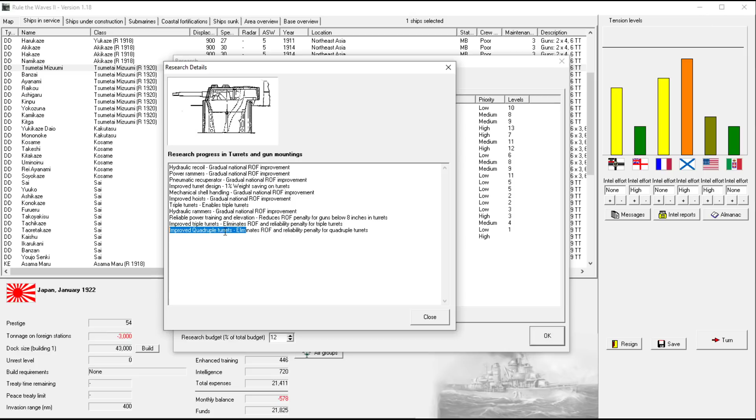Okay, so this list is probably... this might be a small change that would be nice for Fredrik to make. Just to put, if you get improved quadruples, put right above it at the same time, just put quadruples first. So that, I don't know, just make it more clear. Maybe it's not necessary, I don't know.

What happened? Why suddenly are we... what happened? Does my tonnage requirement go up or something? Okay, that's weird. Okay, well let's just... what do we throw? Oh, you know what we do? Where's that one destroyer? Okay, the 3 destroyers, perfect. Is this 3,000? No, it's not. Wow, this is really sad.

So these guys are all going to be sent down to...

Yeah, I think we're going to send all of these to South Pacific. And then that's 2,500, so we need one of these as well. Let's send this one down, or let's send this one to Southeast Asia. It'll be a nicer organization to do it this way, and send this one down to South Pacific.

In the meantime, we'll get any one of our ships. Well, I guess it should be one that we put on active duty. Oh, we don't have any, they're all in the shop. That's right, because we got director.

Can't bring myself to do it yet. Did we already upgrade these guys? It's just funny how we have no quality 1 weapons except for 6-inch guns.

Okay, you can go to active fleet and you can move to Northeast Asia. And then we'll put you back on reserve, but we might actually be refitting the Kushinos.

I think that we do... oh, they already have quality 1 6-inch guns. That was good, that was a good move.

And I actually want more of these... do we build a new light cruiser, or do we just get another Chunchunmaru? These are the ones with the underwater tubes, which is just so bizarre. 1, 2, 3, 4, 5, 6.

The 6 broadside for 6-inch guns is pretty good, and it kind of has the advantage of being able to fire 2 guns forward at any kind of angle. If we're dead on, they can't, but even at like a 30-degree angle, I think it's 30 degrees, maybe it's 15, but it's not that much. We're going to be able to get these wing turrets able to engage a lot quicker.

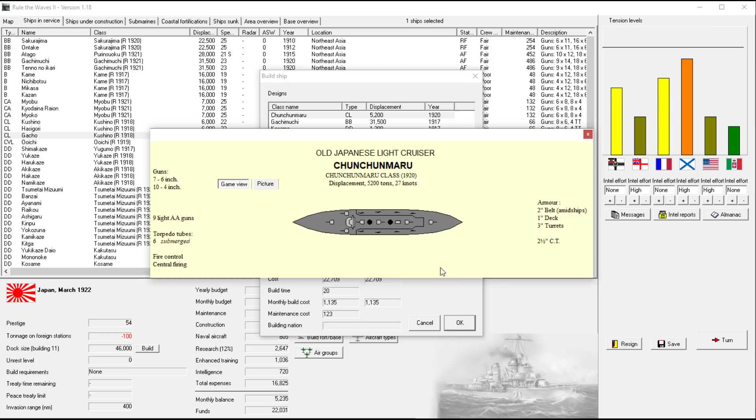Now what's going on here? I did the math. You said 3,000. You're saying that, okay, did I do the math wrong?

These are colonials, so I think they count for more than 600, but let's just pretend that they count for 600. We also have their 9, this is 18, plus 7 is 25, plus 600 is 3,100. I don't know what the hell's the problem here.

What is the problem? What is your major malfunction? I guess we can just toss a bunch of the Akikazes in there. I don't really want to, but it's not that big of a change, so we'll do it.

They will guard the South Pacific with a few points at least. We'll have 6 points worth of destroyers in there. I'm going to leave the Asama Maru there as well. It doesn't matter that much.

Was this 10 or 11? It's only 10, I'll wait a little bit. We'll probably move all the Tsumetai Mizumis into Southeast Asia when the time comes.

And how soon do we have to do refits on these guys? We still have a little bit of time. 5 years? Well, 5 years is getting up there. Although I do quite like the mothball.

Gosh, man. Yeah, I know. We're running out of time.

And we don't want that one wandering off because she has short range, so I'll get one of the Kames. No, they're on mothball, which is great. We'll get one of the Myokos to be foreign station. They might actually be good candidates for Southeast Asia as well.

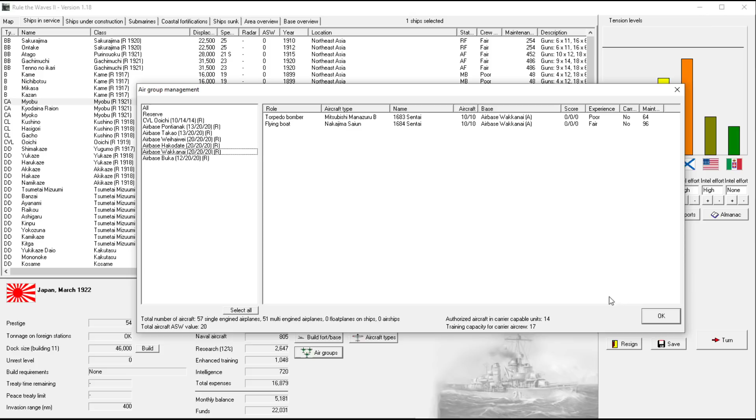And okay, air groups are looking good now. It's probably worthwhile — oh yeah, we want these to all be on reserve. If tensions creep up at all, I probably will activate them, and I probably will mobilize. That will also probably bump the tensions up, and then we'll get to war status.

Yeah, I think I'm going to build 2 more Chunchunmarus. One thing that we'd be okay with having less torpedo defense is if we decided to build a dedicated light aircraft carrier.

Forget the name here for a moment because I think that the name will be changed. So 4-inch guns are going to be good for dual purpose. So I think this is already a good start. They don't need that many guns, we could probably even drop some. Director firing.

Yeah, we're not going to have anything else. 24 — wow, this is actually not a bad airplane, not a bad carrier to begin with. We don't need this speed. So this is 260.

It's a little bit less. Not bad though, maybe we'll leave it at 24. That's pretty good. Okay, and that gives us 2 extra airplanes.

How is it possible that you just don't have a conning tower? I don't want our turrets to be destroyed, so I'm actually going to upgrade this. I like the deck at 2 inches.

Nah, you know what? We're not going to bother. We're going to basically concede that if they hit the flight deck, it's a dead carrier. We will try to do torpedo defense 1. We can get 28 aircraft now, which is still pretty good.

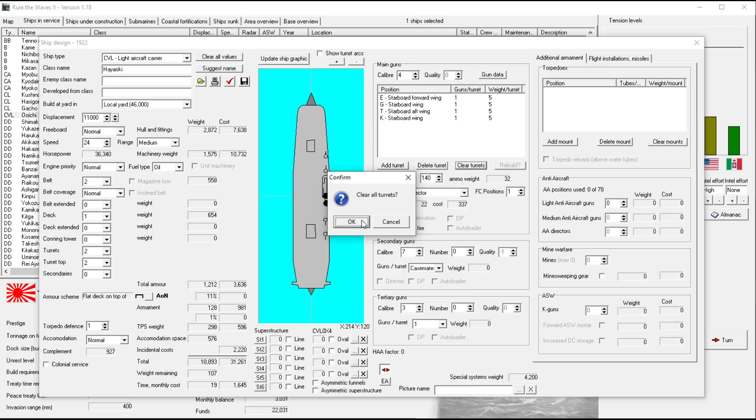Yeah, it would give us one more aircraft, but I think that's not worth it. EGIK. Okay, that's fine.

Oh yeah, we could always up the tonnage until we find — can we get to 30? I would like to get to 30. We can very easily get to 30.

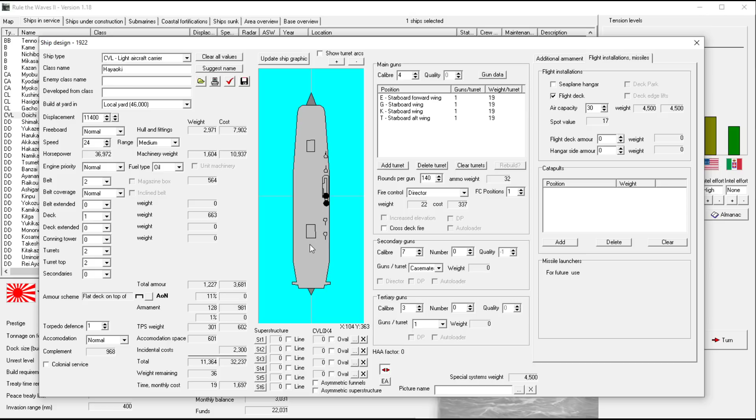What's the maximum for us? 34. Okay, set it to 34 and make it so.

All right, this is what we have to work with. I don't understand why there's no conning tower. Okay, there we go.

It doesn't seem... maybe it's fine, actually. It doesn't seem fine, but maybe it is. Alright, that's not good, no, we're not going to do this. No, definitely not.

Because we're going to want lots of anti-aircraft. Yeah, so let's just crank this and then... 85.

Okay, 22, we can get this up to 2. Alright, the gods have spoken. 2, that's pretty good. How expensive is this? 35.1 — I think it's worth it to get 34.

I mean, this is going to be... yeah, this is pretty good. I feel like this is pretty good. I'm getting excited about this. When I start getting excited, that's when I think I have a design that's worth keeping.

It's going to have at least a decent ability to ward off, and this also has weight built in, which we can later use for mediums and AA directors and dual purpose and all those kinds of things. Frankly, we don't even need director firing, but I don't know—if anyone in the comments knows, does director fire control have any impact on the dual purpose nature of the accuracy for targeting aircraft? So if I chose something like local only, but also put AA directors, would these guns still be as effective fighting off aircraft? Because I'm not expecting my ship to ever engage other surface ships—it's already lost if that's the case. So I just want the 4-inch guns to be useful as dual purpose guns.

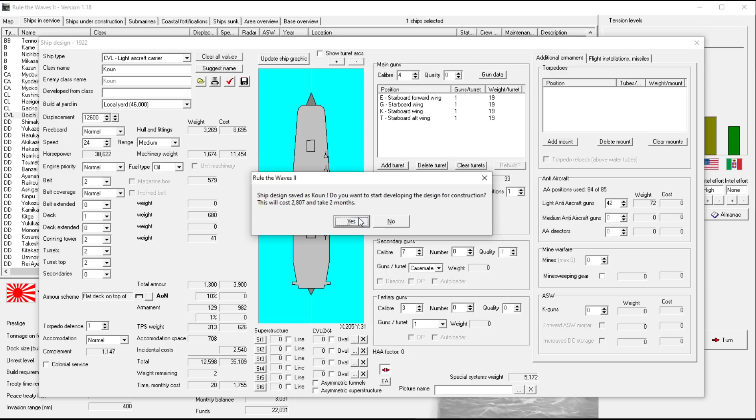So we're going to save this. We're going to let this design be designed. And this light aircraft carrier class should have purpose, should be used for the rest of the series—I do expect it'll be there for the rest of the series because it's pretty efficient.

So you can send it to sea zones where maybe you don't expect as much. We may want to fit it with more fighters and have it more as protection for some battle group or something. Unfortunately, with the battle generator, it doesn't really give us an opportunity to pair ships like that, which I've always thought you should be able to do. I've always wanted to do that, and maybe one day I'll write a mod to do it, but that day is long in the future.

So that's one—we're going to wait for that, and I have the backup name, Nikko, as well. So let's push on. Don't really want to anger the two sleeping giants, but that's not too bad.

Easily surpassing her design speed. See how much more important it is to have not-backwards shipbuilding? Typically with backwards shipbuilding... oh wow, that's actually important.

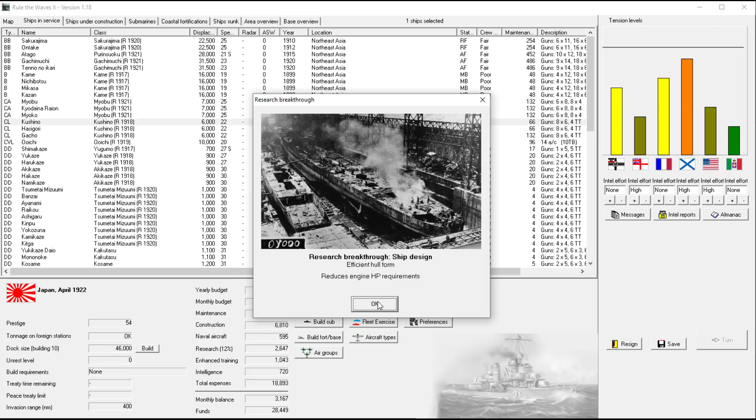We're going to have to redesign the light aircraft carrier. Actually, maybe we don't need to—it's a pretty light ship to begin with. Well, light, 12,000 tons, if you can call that light. Okay, let's rework the design. It only saved us 36. Yeah, we will rework the design.

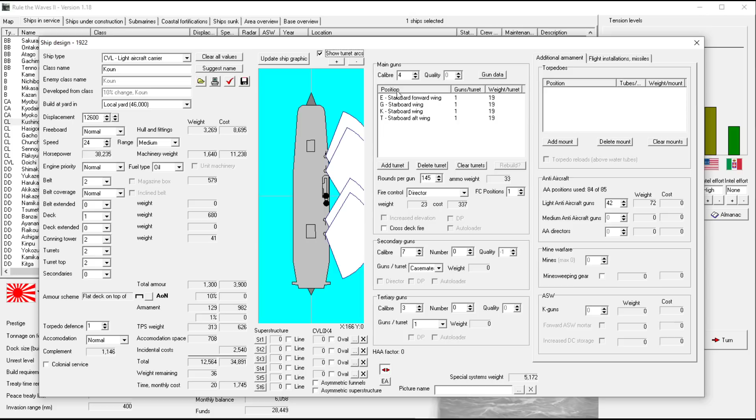Yeah, I think it's worth it, because just getting that is nice. Okay, I was just trying to make sure. Fair enough—minesweeping gear on my light carrier? Are you kidding me? We could always up the ammo, which is slightly more important for dual purpose, but not important right now.

In fact, we could really drop the ammo. 34, we don't really need to do anything—I guess we could just drop this by 1. 34, no, we cannot. We do need to make some changes and then save it so it gives us one more month to redo this. I'll take the rounds per gun up by 1.

And then I guess we'll leave this extra for AA directors and changing around the situation here. It's really everywhere—it's exactly where I want it to be. So this will take 1 month, 279, pretty cheap. We'll get going with that.

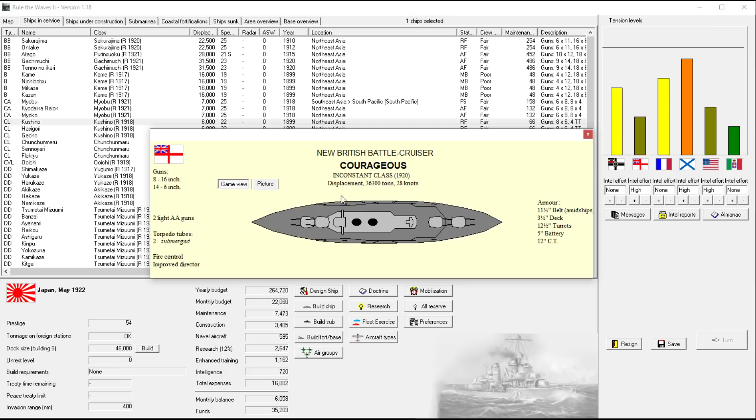I'm glad that I built another two of the Chunchunmarus. They've validated that decision by surpassing their design speed. Actually, they're almost too fast because they have underwater torpedo mounts. Anyway, the Courageous now has 16-inch guns. If they start building a whole bunch of these, we're simply not going to be able to compete with them.

Alright, I'll rework the design. It doesn't really hurt to do this just to check. See, it feels like 34 is... did we do anything?

Well, let's go ahead and build her. So we'll build the Koun itself, and then we'll build the Nikko. I'm not going to put the accents in, but they're there, I think, over the O. And there we have it. In fact, these are so cheap, that's awesome, I might even build another.

The main reason why I'm not building another is because everyone submitted aircraft carrier names, and nobody submitted light aircraft carrier names. So what I'm going to do instead is build one more. Oh my gosh, and I'm going to grab... a lot of the same names are here. So there's a long list of carriers, a long list. I'm going to go work backwards on the list.

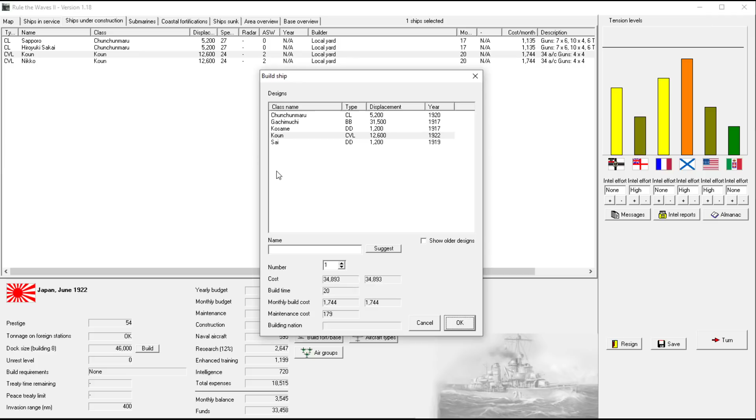I'm going to grab the Torimatsu. Yeah, so we're going to build one more. This will be the Torimatsu. There we go, and we have three.

That makes me happier. We still have some budget, which means we can start accumulating some funds for the ultimate Dreadnought. Ultimate Admiral Dreadnought. No, we really do need Dreadnoughts, I know. We really, really, really, really do.

Thank you. Thank you, Sensei.

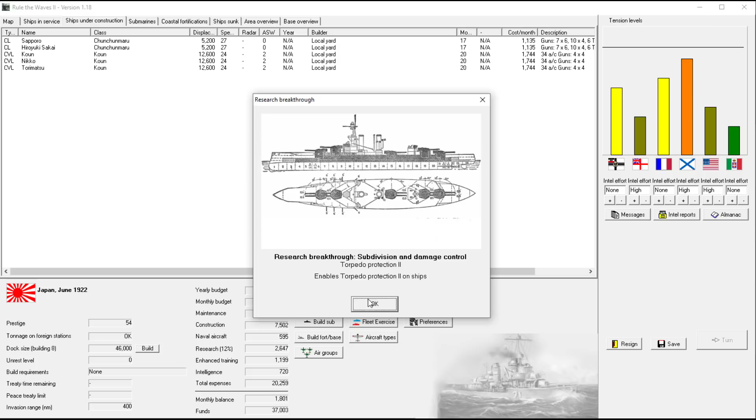This reminds me, I need to upgrade our torpedo bombers. These fighters are actually able to carry ordnance at medium and heavy bomb loads. Significantly longer range, not bad. I'll take it.

Okay, aircraft. Oh wow, we don't have medium bombers, do we? Let's get a new torpedo bomber first. Oh no, sorry, close that.

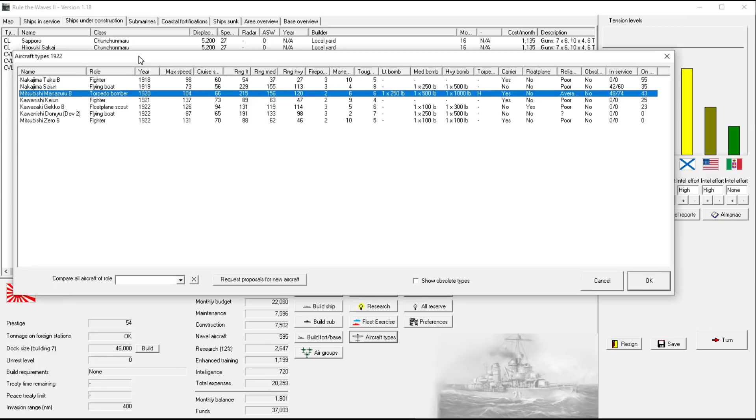1920, 1922. It's not too old, and it looks like it was pretty darn good. Yeah, this one's average reliability. Gosh, I really like that one.

Okay, let's see if we can get a medium bomber. Just curious. Oh, sorry. No, okay, yeah, it's clear we cannot. Well, I think the only thing we can do is basically just...

Reliability is average, though, I'm so happy with that. It's a darn good torpedo bomber. Let's go reliability and range. Let's do it that way and see what happens.

Just kind of experimenting here. I'm pretty happy with the old one, so it's like a good opportunity to just fiddle around with settings and see what we get. We'll be able to tell if the new one is just like a bust compared to the old one. We'll go back to the typical range-speed configuration, but I think that's what I did. Did I do range and speed, or did I do range and reliability? I already don't remember, I doubt anyone does. It's been a long time since I did that 1920 design.

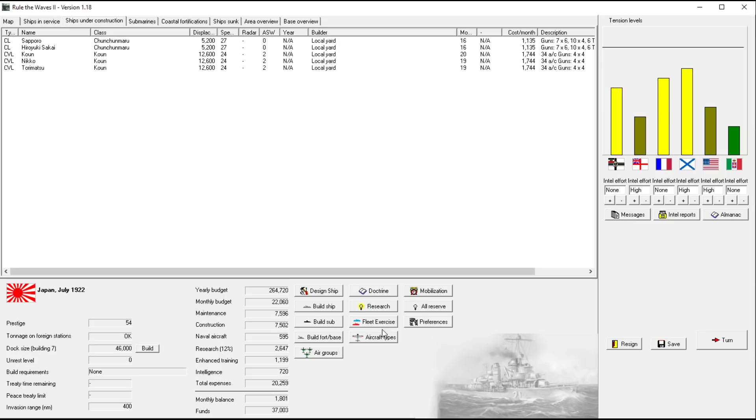Yeah, so I think we have the ability to do more than 20 planes. Yeah, we do. I'm just going to expand all of them, I can later close some or whatever. But for now, I think that getting two groups - this means 20 torpedo bombers, 10 flying boats, and 10 fighters - is what I would do. Yeah, that's what I'm going to do.

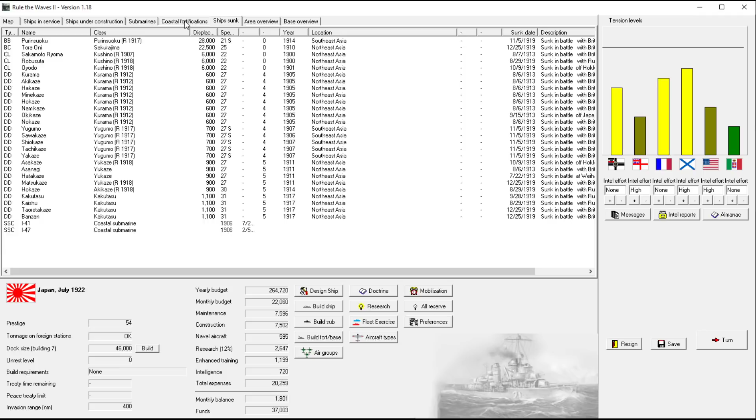It's going to get more expensive building all those airplanes, but this is really good. Finish. Oh, our top spy, what happened?

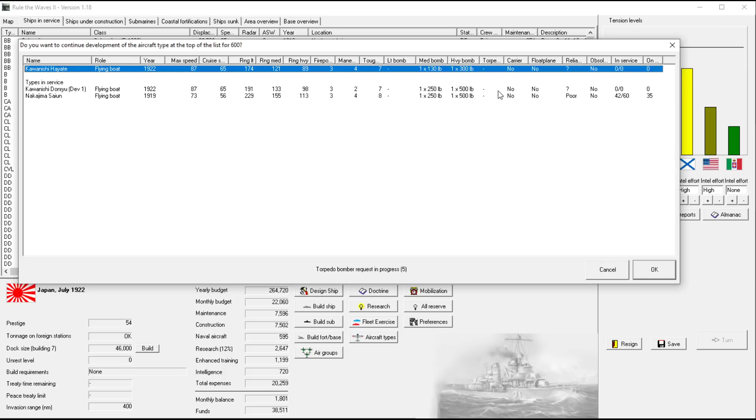Better maneuverability, better maneuverability, that's for sure. Shorter range, same speed, less bomb capacity. No, we'll cancel that one, I don't think that one's worth it.

Okay, so Dreadnought, so it's time to build a Dreadnought. Don't get too excited about that name. Oh my god, we only have 15-inch guns. Oh my gosh. Desperate times call for desperate measures.

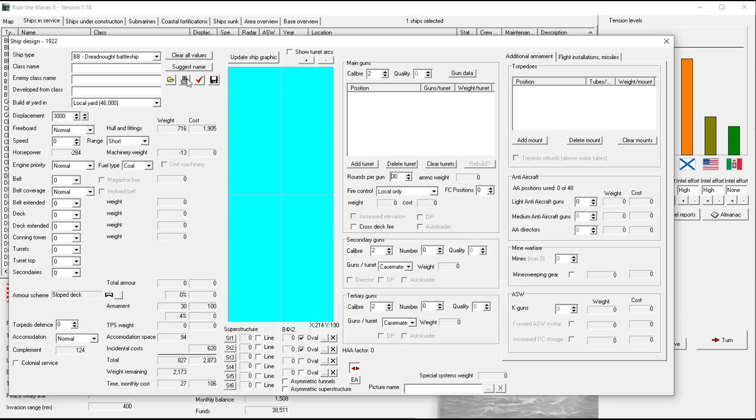The rate of fire on the 14-inch guns is better, that's why I'm leaning towards it. I just feel like they're better. They have less range, but we do tend to fight at pretty close ranges. Of course, we do have improved quadruple turrets.

I think we're not going to be able to build this. Unless we can.

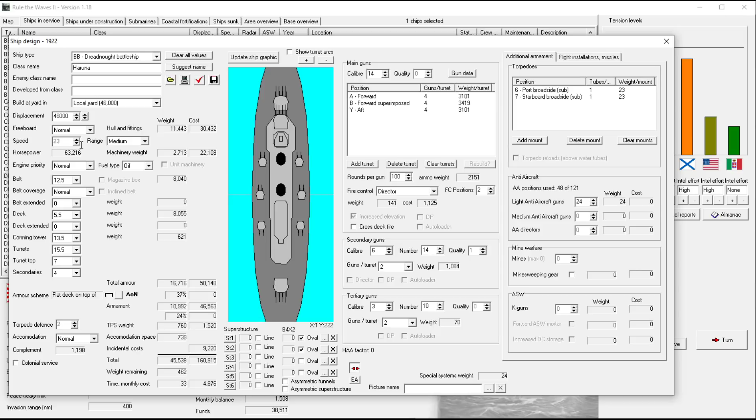What's the speed for my new ships? 23. Well, we should leave that at 23 then. Let's maintain the fleet speed.

Holy cow. Oh my gosh. Good gracious. Oh my goodness, these are some big numbers. Wow.

Okay, so we'd be okay against our own guns, but that doesn't really say anything. Let's start seeing what we do. Okay, even against 15-inch guns, we're looking pretty good, but we know the British are using 16, so come on.

I can always choose their dockyards. I also like this idea, actually. I really like this idea. We're going to have a lot of space left over, and you know what? This is good. Why? What are you thinking, Tortuga?

We only have torpedo defense 2, which is actually still not that great. We're only going to go with speed 23. These are going to be kind of like a... I want them to be essentially less expensive.

So we may even drop some of the numbers just to squeeze down the cost.

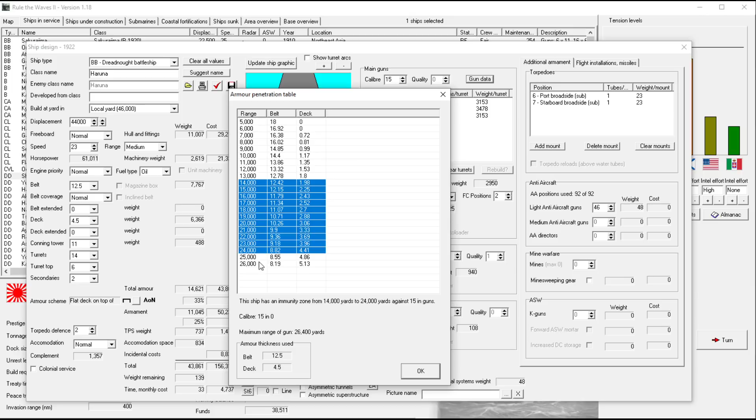This looks a little bit better. Yeah, I think we'll put it here. 4.5. I'm liking this. I'm still liking this.

Let's bring the turrets down to 5.5, that's fine. Okay, alright, this is looking a little bit better to me.

Can probably get an extra set. Take the AA guns down as needed. And this is going to drop not just the cost, but the number of positions we can use.

Okay. 110 is a lot of ammunition.

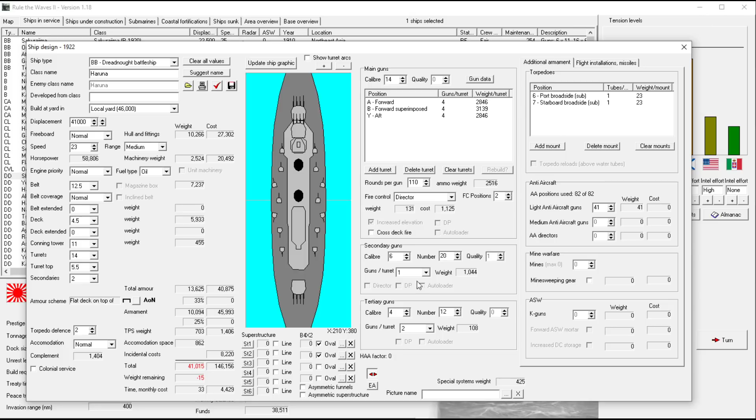That's kind of cool. And they're letting us do it too.

Oh, oh yeah, we need a catapult, which I don't think we've invented yet. No, yeah, this one cannot slow down and launch. Sorry, it was kind of a fun idea, but...

Okay, fair enough. Let's clear the torpedoes. Take this down a little bit.

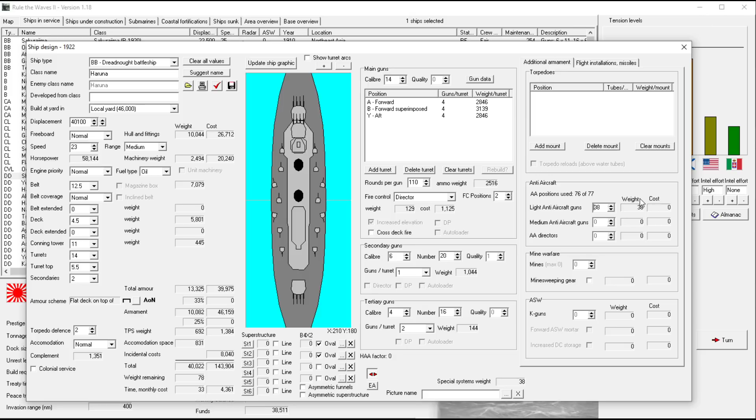Okay, we're finally honing in on the solution. We have 78 tons remaining.

This is probably not going to go anywhere. Okay, can do that. I'd rather have more turret top than conning tower.

Looking good. Looking good. Okay, there it is. So what a crazy... I don't know about this.

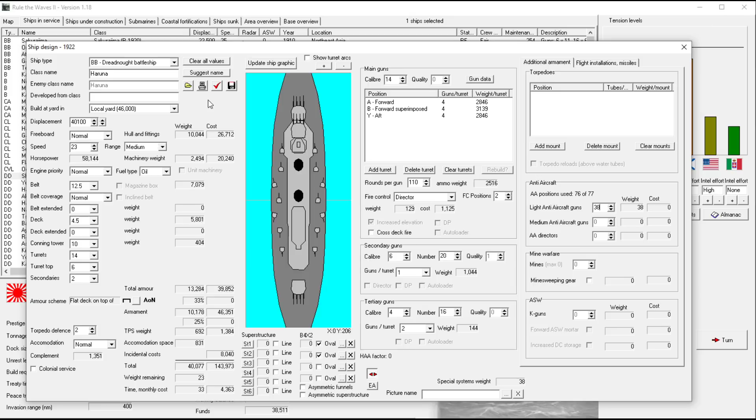We're armoring the turrets pretty heavily, but that's mostly because I only have 3 of them, so we don't want to lose them.

We still have very, very good deck on this ship. Pretty good belt, though. I mean, the belt's nothing to laugh at. 12.5 inches, it's very good.

The armor has been improved several times, so this is good armor. 12.5 inches, turrets are at 14, so they're going to be pretty tough to penetrate. I like it.

It's kind of an experiment with the rate of fire. So we have 12 rapid firing 14-inch guns.

It's going to be a long time before we get these, but I think I'm going to go ahead and save it. But first, let me bring up the name.

And this behemoth of a ship is going to be known as the Daigo. Again, pronunciations are not expected to be correct.

And we wanted her over 40,000 tons. She is over 40,000 tons. And by over 40,000 tons, I mean 40,100 tons. That's right, it's a metric thing. Long tons, short tons, you wouldn't understand.

Okay, well, this is good. I like this.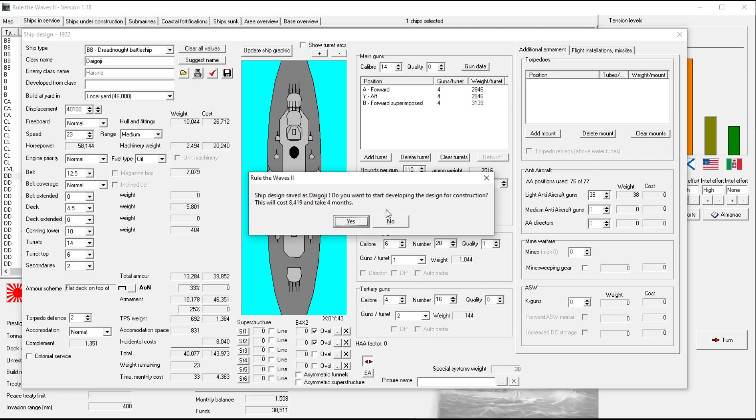Build me the Daigoji, whatever. The thing I will learn to pronounce by the time the next episode happens, hopefully.

And now I think you can bring me to war. I'm a happy man.

Damn it. Damn you, France. Damn you. Oh, God.

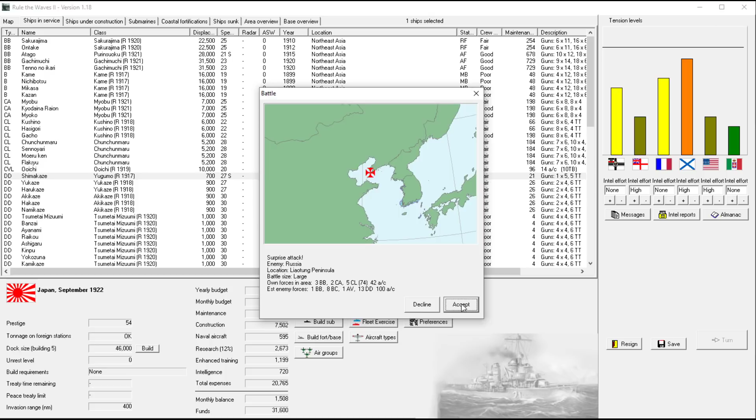What do we have? Oh! Oh! Thank you, God.

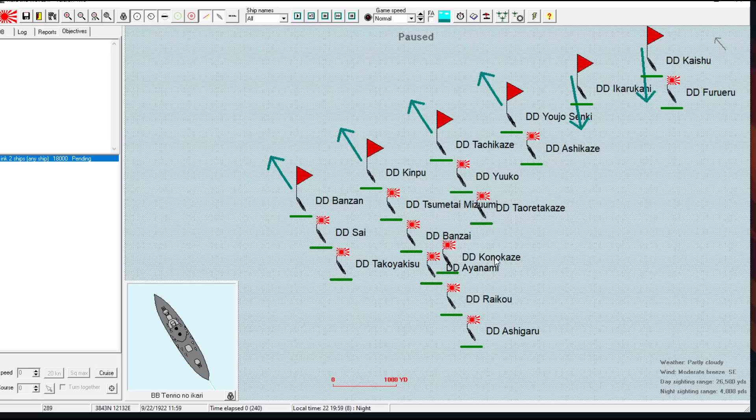I thought that I maybe didn't have them ready, but they were in reserve. Thank God, thank God, thank God. Oh, my Lord.